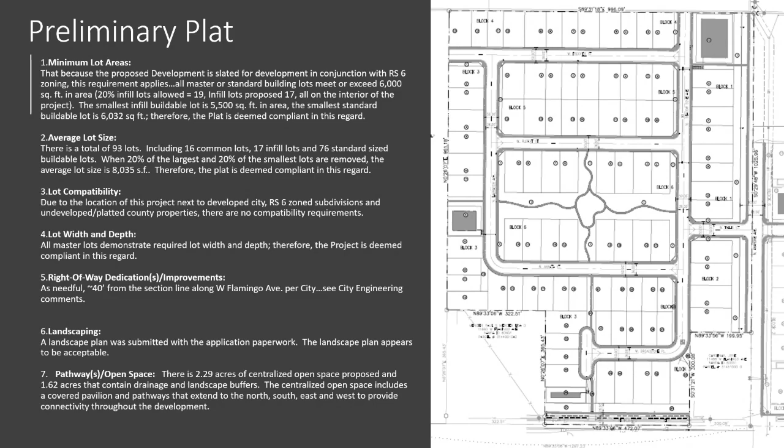So we did receive public input from the building department, from GIS for a couple of street names, and from engineering with their standard comments and conditions. The conditions of approval listed in your staff report reflect those comments.

This is your motion for recommendation to City Council for the annexation and zoning to RS6, and this is your motion for the action on the preliminary plat. I will stand for any questions.

Any questions for Kristi? Do we have sign-up sheets in the back for people that are here? Not for this one. Do we have anybody signed up on the spreadsheet? Nobody signed up for number 1 on the spreadsheet. Nope, that's it then.

Did you guys have any questions for the applicant? Then I would entertain a motion to close public hearing. Second. It's been moved and seconded to close public hearing. All those in favor? Any opposed? Okay, public hearing is closed.

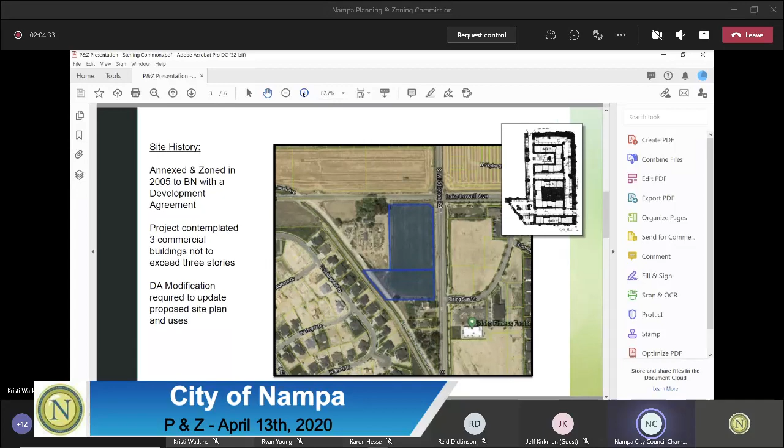So it was annexed and zoned in 2005 with a development agreement. At the time, the project had contemplated 3 commercial buildings not to exceed 3 stories. And what we're requesting tonight is a DA modification to modify those requirements as well as the site plan.

What I've provided on the screen for you this evening was the original site design for the project that contemplated an access off of Lake Lowell, as well as off of South Middleton Road, and I'll get into that a little bit later. It also showed large commercial buildings, 2 U-shaped buildings on the site, as well as one on the southern boundary that was a strip building. These buildings were not to exceed 3 stories or 30 feet. And in our southwest corner, there was a parking lot for those facilities.

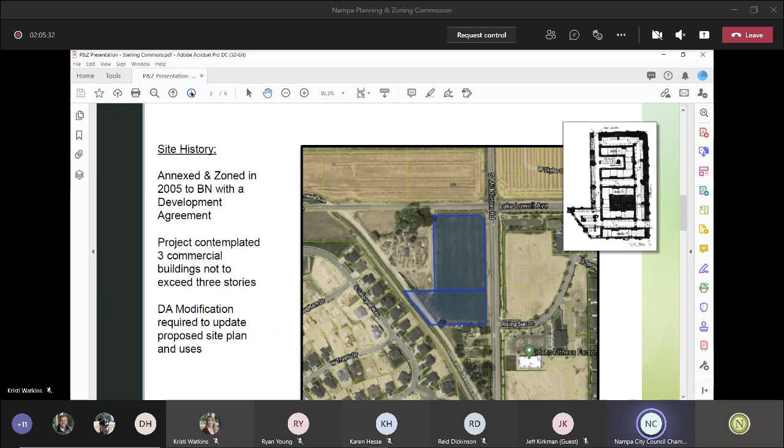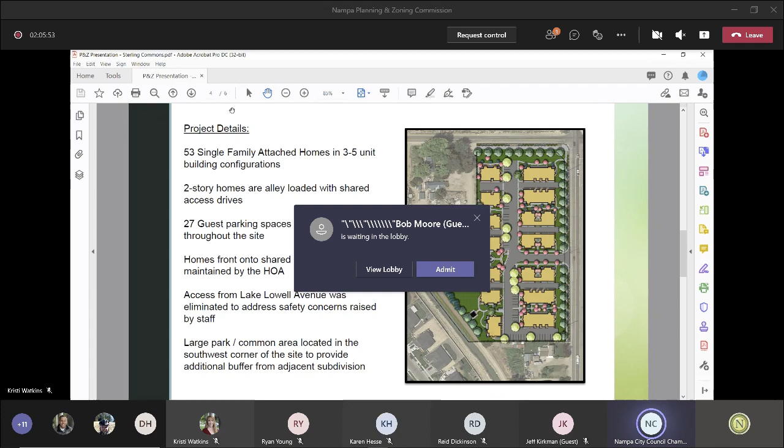Next slide please. So our project tonight that we're bringing before you is 53 single-family attached homes, townhomes, in 3 to 5 unit building configurations. These are 2-story homes that are alley-loaded with shared access drives. We have 27 guest parking spaces also dispersed throughout the site, in addition to the parking that's required for each unit.

We have a 25-foot landscape buffer along Lake Lowell Avenue, as well as along South Middleton Road. And these homes will front onto a landscape mews that is maintained by the HOA. So there will be a lot of common spaces throughout the project accessible to all of the residents, open, active, and passive green spaces for everyone to enjoy.

Can you go back for a second please? So in response, and we really appreciate working with staff on this, we made a last-minute change in response to comments that staff had made about concerns with the access onto Lake Lowell. As you saw in the previous application that's part of the current development agreement, there was an access point off of Lake Lowell. There was some concern that the traffic conflicts with the intersection, as well as the Whistle property, the undeveloped parcel to the west, could create issues in the future.

So we worked with staff to revise that plan, and what you see before you tonight is we eliminated the access off of Lake Lowell. This changed the configuration of our site plan, but we feel it's a better plan in terms of safety as our primary concern. So now we take primary access off of South Middleton, and we have a hammerhead turnaround at the north end of the site to meet fire turnaround standards. Engineering has reviewed it and they were okay with the plan. Actually, Caleb had suggested somewhat of this revision that we've fine-tuned.

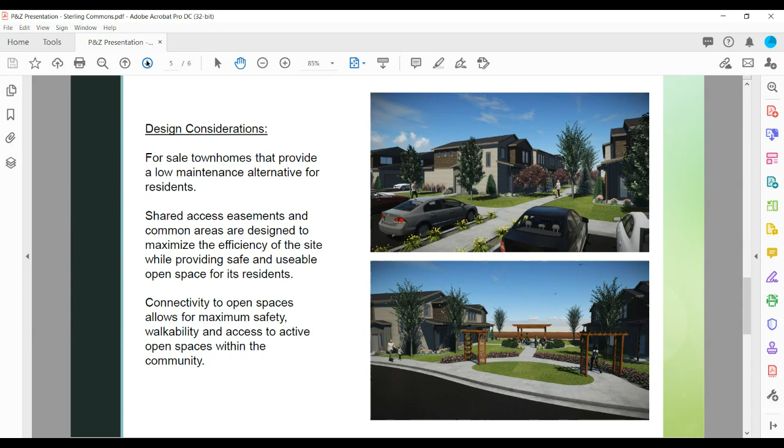So as you see on the slide at the top, that's a shot of what it would look like down the common mews, where folks would access their front doors and their patios would front onto that — some active and passive open space there. The image on the bottom is the view of the park as you drive into the site, looking forward as you head west, into that common open space usable for everyone, with benches and lawn areas for folks to use.

Additional considerations: we are aware that there was a project that came before that was denied, and the neighbors were very concerned about that. We held our neighborhood meeting, and they voiced their concerns about the potential impacts this project would have on their properties.

Our additional design considerations for this site layout really focused on a few things, including the surrounding conditions. This project sits actually 10 feet below the Carriage Hill subdivision to our southwest. That was the bulk of the comments we received, from those homeowners. We did have some folks say this is a great project and they're looking forward to it, but others had concerns.

To address that, not only do we have the canal as a buffer — an 80-foot easement — but we placed the park deliberately in that corner to provide some relief between the two densities. In addition, we oriented the buildings and placed the smaller three-unit buildings adjacent to that side, to help transition the density from the lower density out to our site. The site slopes from the southwest corner to the northeast, with 10 to 12 feet of fall through the site heading northeast, so we've tried to place the buildings to help minimize any perceived effects. The canal easement provides additional buffer, and we've tried to orient the buildings to work well within the site and within the context of the other homes.

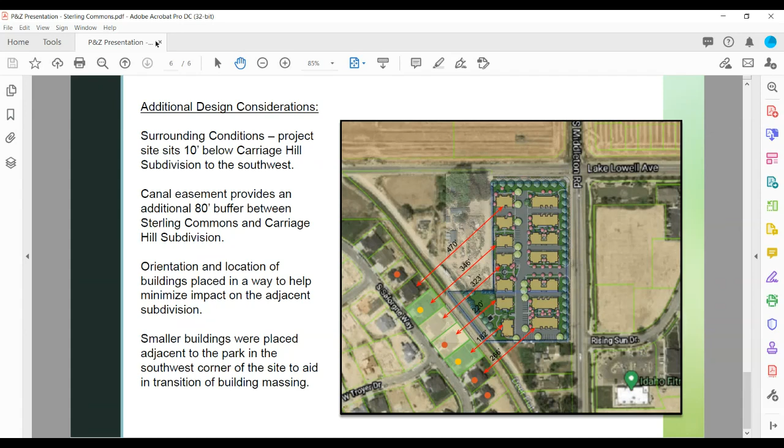So with this project, Kristi, maybe if you could change back to the site plan itself. There we go. So in making some of these changes to improve the safety, there were a couple of other advantages that happened.

We actually were able to increase the amount of usable open space for the development. We did actually increase a couple of lots as well. So we went from 50 to 53, but really trying to maximize the usability of the site, but then also making it a nice open space area.

For the residents. Also, when we made that change, we actually increased the number of parking units that we could get on site. So it seems a little counterintuitive, but the types of buildings, modifying from a 4-unit building to a 5-unit building, the dimensions were different. So we actually gained parking, we gained open space.

And we felt overall at the end of the day, it was increasing safety, number one, of course, but then also being able to increase the amount of open space for the residents. Our total common open space is now at 26.6%. In this zone, there is actually not a requirement for open space, but we feel that this is a good use of the land throughout the project.

And let's see. As I mentioned, the staff has been great to work with. We've really appreciated their feedback. We've reviewed the staff report. We're in agreement with their conditions of approval that they've recommended. And so, tonight we're here to request your approval. And with that, I will stand for any questions.

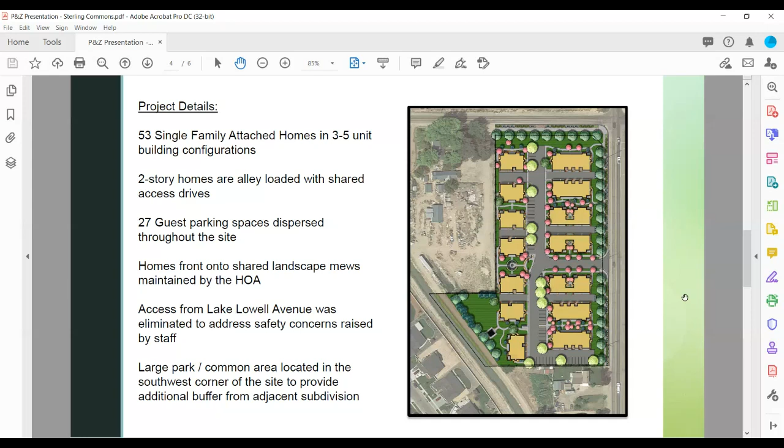Madam Chair, this is Commissioner Kirkman. I have a question. Go ahead. I didn't catch the applicant's name at the beginning, but we've had a few of these development agreement modifications come before us, and I'm sure that's not going to be the end of them.

But my question to you is the change in this particular development agreement that you're seeking, is it based on just economics and the change in the market and circumstances as far as housing, and was it just not viable for the commercial buildings? Yes, actually, we've looked at, this property has been annexed and zoned for a number of years and has sat vacant. I can only assume it was due to market conditions. Obviously, as we're all aware, housing affordability, availability and housing option type, throughout the valley, not only the city of Nampa, is very, very constrained right now.

Can I make a comment to Jeff, because I live right near that area, and maybe I know something he doesn't know. But right across the street from this is a very large vacant area that's got a gymnasium now and some other building going in, a dentist's office. And it's been that way for 12 years, vacant. So if there was any call for commercial buildings, they would have been put in there a long time ago. So they're probably making a very good decision, taking the commercial buildings out and putting in something that's more usable for the public.

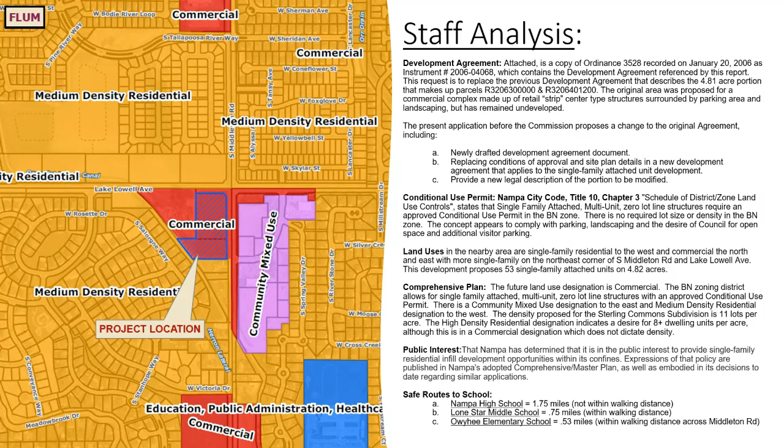The Safe Routes to School analysis states that Nampa High School is 1.7 miles away, which is not within walking distance. Lone Star Middle School is 0.75 miles away, which is within walking distance. Owyhee Elementary School is 0.53 miles away, which is within walking distance, but they would have to cross Middleton Road to do that.

The preliminary plat, based on the revised plat they are going to be submitting - not this layout, but the one she showed you, because I haven't received the preliminary plat from them yet - will provide for 53 buildable townhome lots and 10 common lots on 4.82 acres.

They shall not exceed 3 stories based on the BN zone, but I believe she has indicated that that would not be the case anyway. There are no requirements for a minimum lot size.

The landscape plan will need to be revised to provide better visibility at the intersection of Middleton and Lake Lowell and identify appropriate planting methods. A revised plan was submitted on April 7th that shows a 25-foot landscape buffer along Middleton and Lake Lowell, so that eliminates the request to City Council for the waiver.

The applicant has stated that pathways and sidewalks throughout the site offer safe connectivity and walkability for residents, while a continuous landscape palette provides an aesthetically pleasing and cohesive community. All common areas and open spaces will be maintained by the Sterling Commons Homeowners Association to preserve a unified appearance.

Nampa City Code 10-22 dictates the number of parking spaces required. Single-family and multifamily residential shall provide 2 parking spaces per dwelling unit. This project is required to provide 106. In addition, they've proposed 27 guest parking spaces.

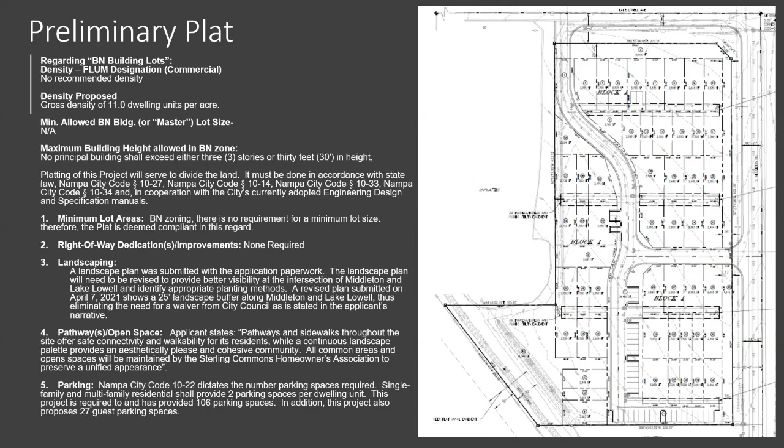Did we have anybody sign up here to speak? I have 2 people on the list here. Did we have sign-up sheets back there? If they came in and wanted to sign up, we signed them up on that spreadsheet. Oh, because I got this spreadsheet sent to me like 3:30 this afternoon. Just a link. I saved it to my iPad. We have 2 people signed up, Palmer and Swanson. So that's all we have, and Sharon Palmer are opposed.

Are they here to testify? And then Rob Swanson says he has concerns. Is Rob here? Okay, what about online? Not seeing those names online.

Is there anybody here that would like to testify on this matter? Come up and give your name and address for the record. Hello, I'm Cheryl Higley, and I'm at 12441 South Abbott Downing Way here in Nampa.

And I have concerns too. I live nearby, and I can't tell on the plans where the parking is, other than maybe the guest spots. I agree with the gentleman online - I think it'd be good to table it until you can see the final plat, or the preliminary plat. I've seen developments in Meridian where if the parking is supposed to be in their garage, I really can't tell from the design. I've seen where there's parking spilling out into the narrow driveways and so forth. And I'm new here, but I have a concern that in the commercial, the BN zone...

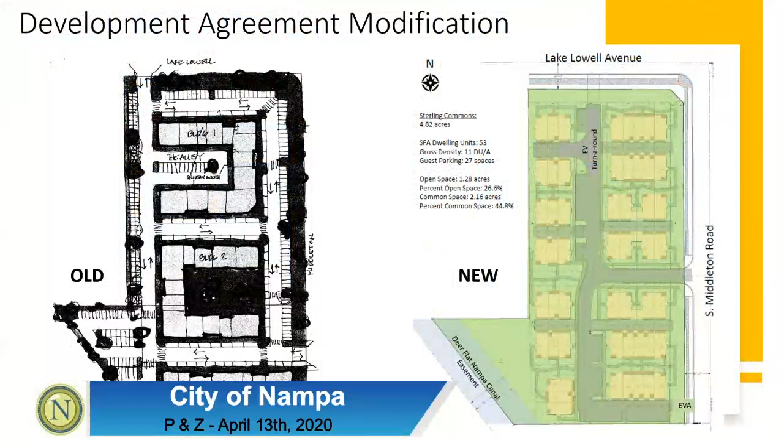First, I'll follow up with the question. In the staff report, and part of the conditions of approval, it was a comment that Caleb had made from engineering, and in our effort to address that access issue and illustrate that, that was one of the conditions of approval - that before we go to City Council, we submit the revised plat that matches this concept. We just hadn't had a chance, but we were trying to be on top of things and address those concerns and really demonstrate that we're taking staff's concerns and the neighbors' concerns seriously and get those issues resolved.

In the plan you see on the screen on the right-hand side, we've got a common service drive. It'll be a private drive. In Caleb's comments regarding our plat, he identifies that for certain dimensions there will either be striped no parking on one side or both sides, depending on the width. So we'll comply with what engineering requires out of that. I believe we have enough room.

We don't even really need to park on either side because, as you can see, those are all parking spaces there - perpendicular spaces. Each unit - some of the townhome units have a single car garage and some have a 2-car garage. So if you have a single car garage, you'll have one dedicated space out in the parking stalls that Christy's indicating where those locations are. We've got some along the southern border, some through there, and then some as you go up through there as well. So some will be dedicated for each unit if they only have a single car garage, and the others will be dedicated as guest parking spaces and identified that way.

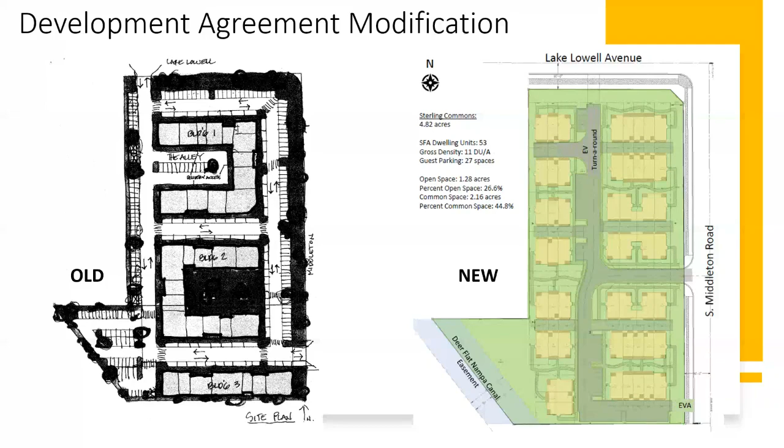I would entertain a motion to close public hearing. Second. Who made the motion, Brett? Brett made the motion, Ron seconded, to close public hearing. All those in favor? Aye. Any opposed? Okay, public hearing is closed.

You guys got 3 things.

Madam Chair, this is Jeff. Yes, sir. I don't hear anyone else talking, so I'm gonna jump in here. I think you had those questions before. It sounded like you were ready to go.

So I think this is a great project, and I appreciate the developer's concern for mitigating some of those issues with the proximity to the neighbors and putting those smaller buildings closer to the homes there. I think this is going to fit well in this location. So if there's no further questions or comments, I'm going to make a motion that we recommend approval to City Council.

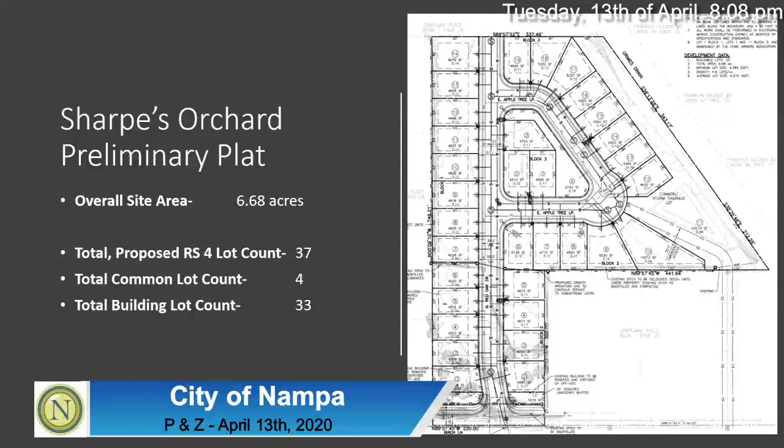I've asked Parker to put the site plan up. This is an infill project off of Birch Lane. We're proposing 33 residential units on just shy of 7 acres. The property to be annexed is located in the medium density residential comprehensive plan designation, which calls for a gross density between 2.51 and 8 dwelling units per acre, and this is smack dab in the middle at 4.9.

The zoning proposed uses the city's RS4 zoning designation. Surrounding zoning is all residential already, and there are no waivers of standards or variances being proposed with the application. It is a true infill site. The property is very easily served by the city, the city's sewer, water, and pressurized irrigation systems are already at the property and all have capacity.

I'd also point out that the property is located near employment centers, so it's in a good location. About 19% of the project is in open space, and we've proposed an internal community playground with a picnic shelter. Let me see if I can point to that. If you look at the internal island, the park area is on the east side there.

With regard to the staff report, and you'll hear from Parker in just a moment, we are in agreement with the terms and conditions that have been proposed. There's two items that I would note.

One is that the engineering department, Caleb, mentioned a suggestion that traffic calming measures may be warranted on Red Oak, the north-south street. So one thing we would like to look at with the engineering department is potentially a raised pedestrian crossing at the island that would allow folks to get from the west side to the east, and it would also serve to add some traffic calming through there.

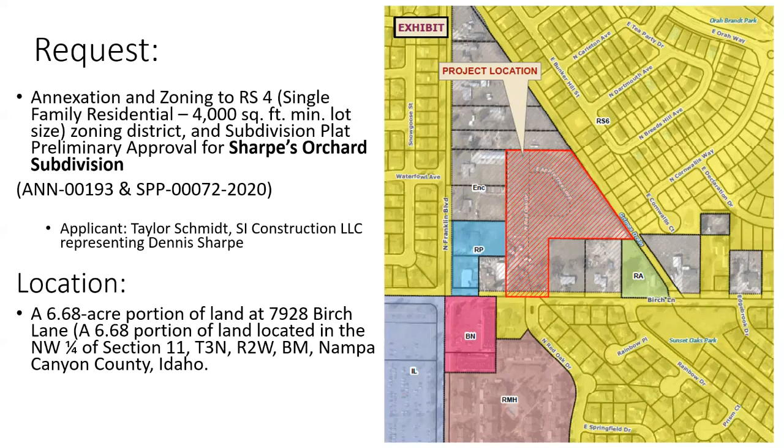The property is currently outside of the city limits, but is contiguous on multiple sides. It is bordered on the north by Canyon County residential properties, RS6 and BN to the south, RS6 to the east, and RP and Canyon County residential to the west.

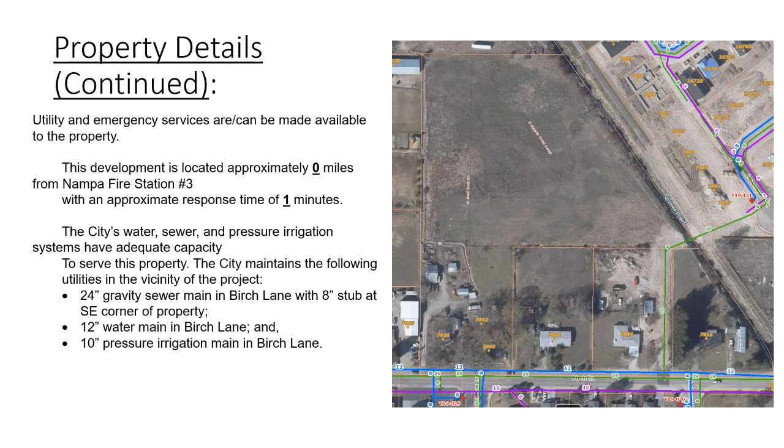The applicant's purpose is to zone the property RS4 to allow 33 buildable lots and 4 common lots. All utilities and emergency services are available. Nampa Fire Station number 3 is across the street to the south, with a response time of 1 minute. There is adequate utility capacity to serve the property.

The property is eligible for annexation since it is adjacent to Nampa city limits. The proposed zoning and development plan conforms to the guidelines set forth in the comprehensive plan. These are the conclusions of law required for annexation: that it be contiguous, that it be reasonably soon to be available for orderly development, and that it be consistent with the comp plan.

Single-family residential land uses surround or lie near the property, with some commercial uses nearby. The proposed RS district is intended for medium-density urban single-family residential and compatible uses.

A stable and healthy environment, together with the full range of urban services, makes this an important land use district within the community. It is in the public interest to provide varying residential housing opportunities for citizens, and the current real estate market has a pressing need for additional housing inventory. One of the major purposes of zoning is to promote orderly development, which preserves public health and safety. Site development will be regulated by the building permit review process in accordance with the RS zone regulations.

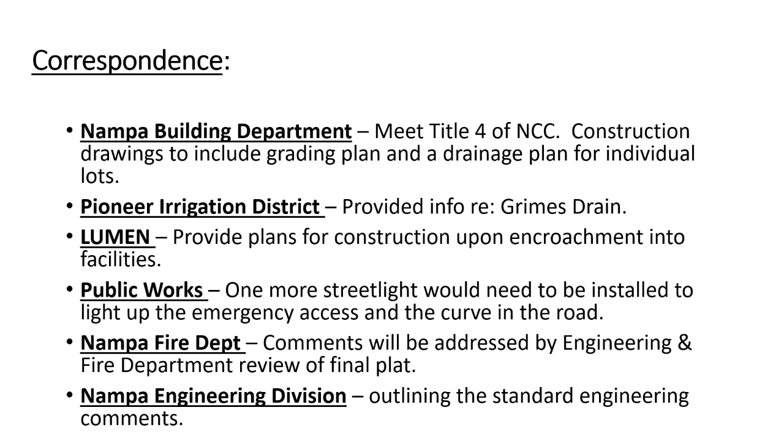We received information from the police department regarding the development, stating it would increase personnel by 0.15 officers and 0.05 support staff. The closest police station is 3.4 miles away. The reporting district receives 307 calls annually, and the top call type for the area is traffic stops.

Regarding the plat, the preliminary plat proposes 33 buildable lots and 4 common lots on 6.68 acres. The property will take access from Birch Lane with an emergency access to the southeast.

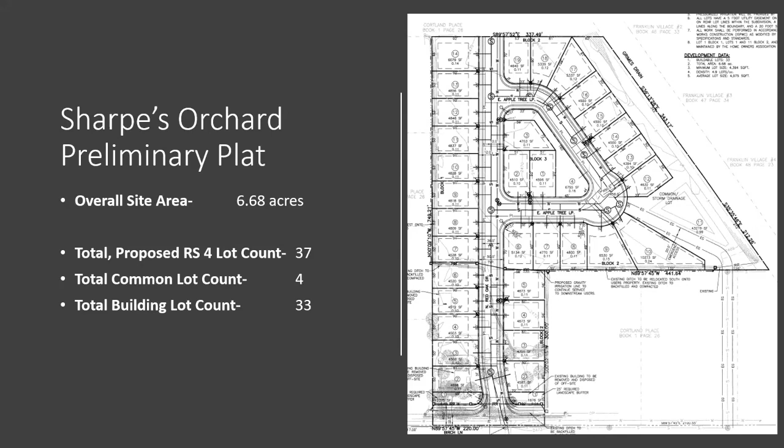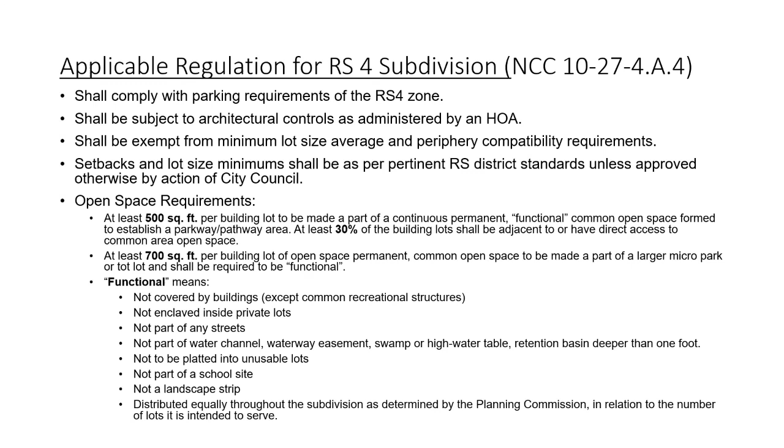RS4 subdivisions have additional requirements in regard to open space while being exempt from others. There's no lot averaging or lot compatibility requirements for RS4 subdivisions. Open space is required at the rate of 500 square feet per lot for pathways and 700 square feet per lot in functional open space. The term functional means essentially not being used for any other purpose, such as landscaping or streets, and it needs to be distributed equally throughout the subdivision as determined by the Planning Commission.

So all of the lots exceed 4,000 square feet, with the smallest being 4,394. Lot averaging doesn't apply, as I said before, and lot compatibility also does not apply. All the lots meet the required width and depth. Right-of-way dedication will be 40 feet from the center line of Birch.

The landscape plan was submitted and approved by the city forester. The open space overall equals 1.27 acres, which is 19%. The requirement for functional open space in RS4 is 700 square feet per building lot, which equals 0.53 acres for this subdivision. So if you exclude the landscape buffer, emergency access, the ditch, and drainage pond, the subdivision proposes 0.51 acres of functional open space.

But if the drainage lot is able to be used as functional open space, which engineering has stated would be possible depending on the materials they used, the total space would be calculated at 0.71 acres. The only proposed pathway is the emergency access in the southeast corner of the subdivision, and here's a calculation of that.

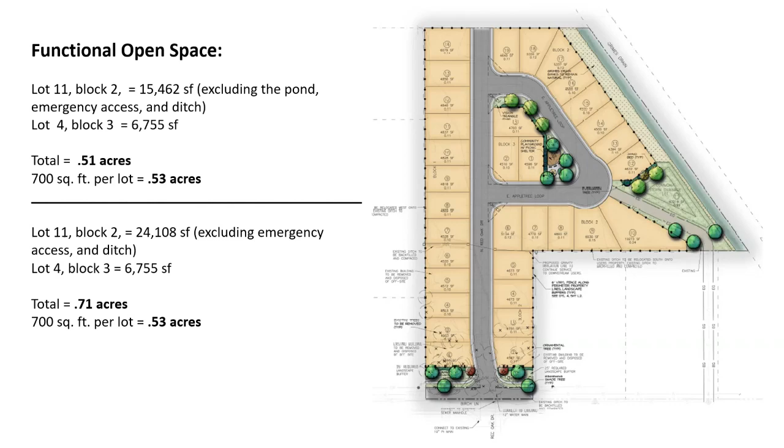The conditions of approval are listed in the staff report, which we can go over if requested. It's standard conditions requested by various departments. And these are the potential motions for annexation and zoning, as well as the preliminary plat. I will stand for any questions.

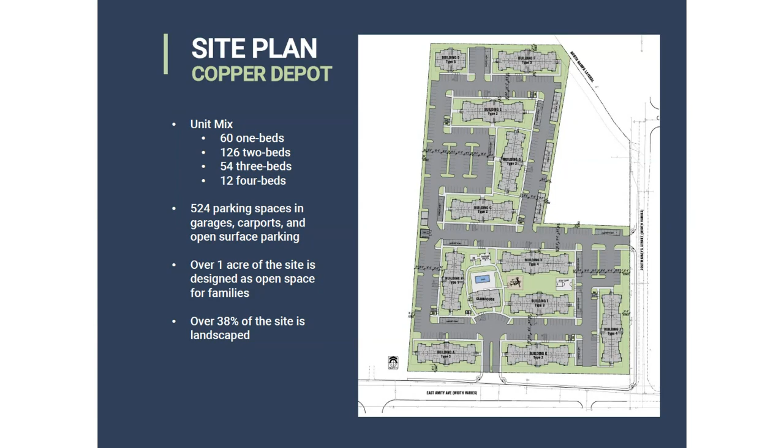I think the main thing I want to hit on here is what we're proposing. I've read the staff report, met with one primary neighbor, and I know we're going to have opposition, and I understand that—I don't take it lightly, and I don't dismiss it, but what I really try to do is mitigate to the best of our ability. I think it comes down eventually to whether it's this body or council deciding if the greater good of the community is worth it, and if we've done all we can reasonably to mitigate. In this case specifically, there's a development agreement in place that allows commercial development, and that commercial development could be substantially more impactful than multifamily development. So it's hard for me to tell neighbors with a straight face what I'm doing could be worse, but the reality is, without a CUP approval, it could be worse.

I want to, Christy, if you can go to the next slide, please—just talk through our site plan a little bit more, and talk about some of what we've tried to do to not adversely affect the neighbors.

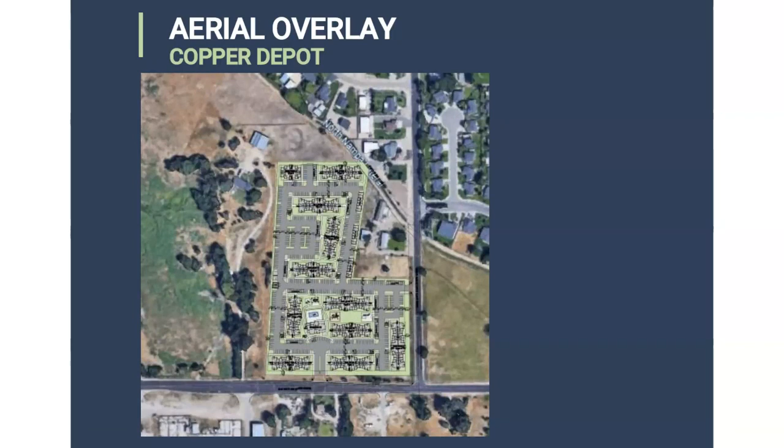I would otherwise mention, in terms of appropriate development and not adversely impacting neighbors, that a condition of approval will be following any traffic mitigation measures as detailed in the traffic impact study, and we're of course willing to follow those.

Maybe we could go ahead a couple of additional slides. I don't want to spend too much more of your time other than to really just hit on: we take a great deal of pride in making sure we deliver a product that's indistinguishable. It's affordable, which means there are rent requirements and income requirements, but we want that to be indistinguishable from market rate apartments. So we build a product that we feel you would never know the difference.

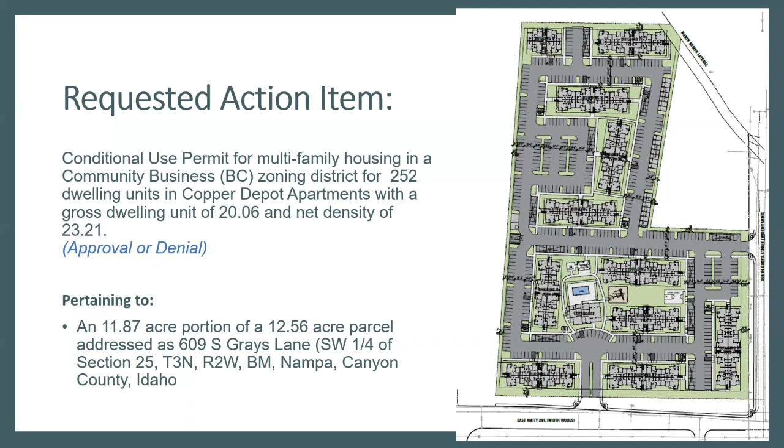So some history on this property. In November of 2008, this property was annexed and zoned to BC with Ordinance 3913. And I do have a typo, I believe, in my staff report. The development agreement does not provide a list of uses that were permitted or not permitted for this commercial zone. The property is currently within the city limits and is zoned BC.

It has Canyon County residential and RS18 to the north. Canyon County property to the south, which was the old meat processing plant. Canyon County to the east, which is a residential property. And Canyon County to the west, which is also a residential property.

So services, utility and emergency services can be made available to the property. The fire department has noted that it is approximately 3.1 miles from Nampa Fire Station number 1, with a response time of 8 minutes. Sewer and water have adequate capacity here. There is sewer and PI. They're not readily available, and they will require some easements through other properties to the east and west, or there is a significant stretch in Amity to accommodate the connection to this service. There's a 12-inch water main in Amity Avenue and a 10-inch water main in Grays Lane.

So if you choose to approve, you are required to find in accordance with these criteria in Chapter 25. So the applicant's request for the conditional use permit for multifamily in a BC zone is required by code in Chapter 3. The proposed multifamily dwelling development, location, size, and design should not adversely affect the livability or appropriate development of the abutting properties and surrounding neighborhood. That the location, design, and site planning of the proposed multifamily apartments will provide a convenient and functional living, working, shopping, or civic environment, and will be as attractive as the nature of the use and its location and setting warrants. And that the development is consistent with the appearance of the area and enhances the area in its basic community function.

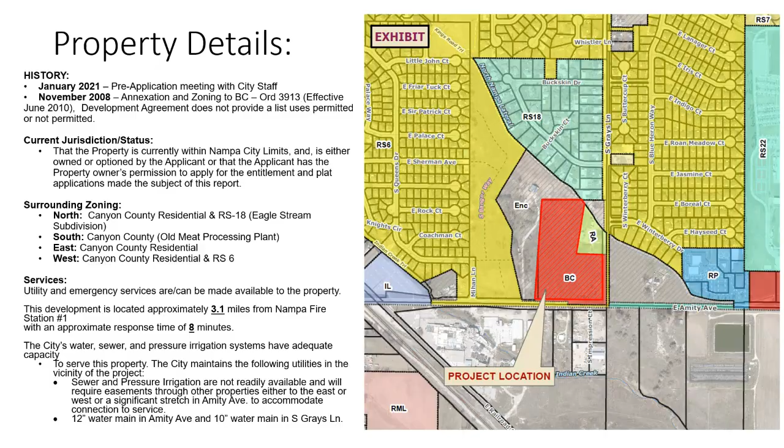It's a tricky one. Here, I've got a few comments I'd like to make. This was annexed in 2010, is that right? So the Buckskin or Buckhorn subdivision, the Meadows were both in long before that. So the public at that time was evidently okay with it being that.

We now have another subdivision just to the west, about 70 homes. Buckskin is all half acre, bigger lots. The Meadows is all RS6, decent sized lots, and the new one going in is decent size. It just, to me, is not compatible with everything that's going to be on three sides of it. It doesn't fit in the neighborhood. I have a hard time giving it a conditional use permit to change it from what the neighborhood agreed to

back 11 years ago, to allowing this to go in. You look at it from an aerial view and you've got nothing but single family homes, single and two-story homes, and that's basically going to be on three sides of it other than the wedding venue. It just does not fit in the surrounding area. It just is not compatible. I just don't see it fitting at all in there, whether it be two-story, three-story, or what. Multifamily just does not fit in that neighborhood to me.

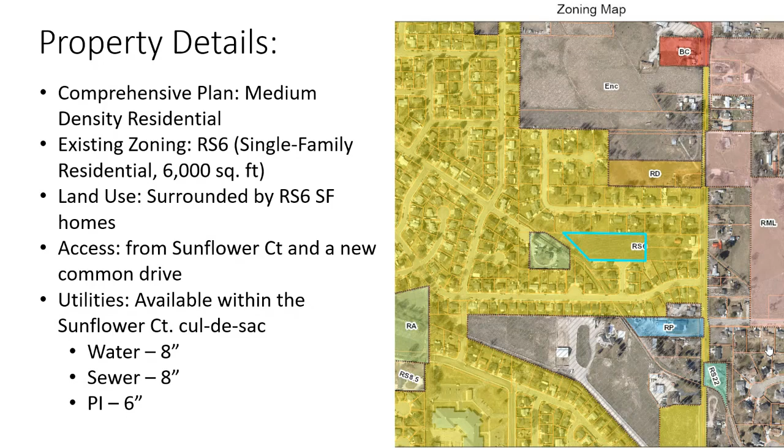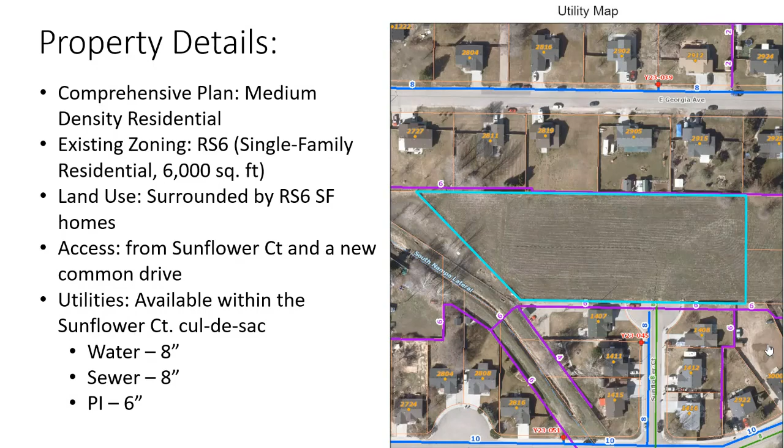It's accessed from Sunflower Court. I'm sorry, I didn't progress through the zoning, there's the zoning there. It is accessed from Sunflower Court, so you can see that unfinished cul-de-sac. They'll basically finish out that cul-de-sac and then have a private drive to access the other 4 lots. Utilities are available to the property.

Lot 6, 7, and lot 1 are all accessed off of the cul-de-sac here. There's more than 22 feet here accessing the cul-de-sac, and then the private lane for these other 4 properties.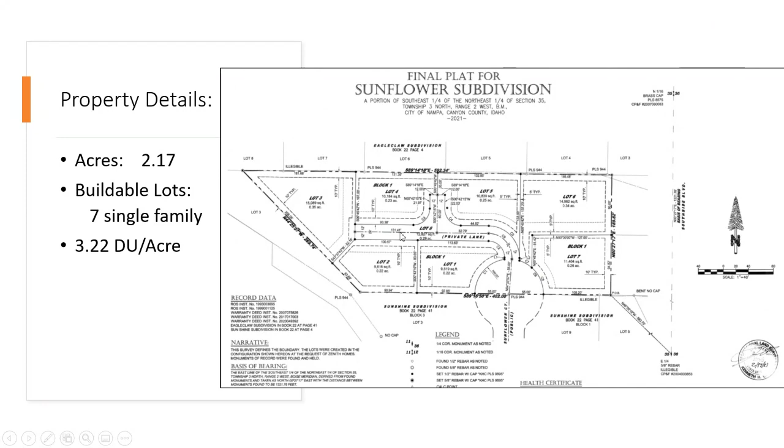So applicable regulations 1027-4F outlines the conditions of how you would look at this for approval. I've highlighted those. You need to evaluate a proposed plat's design based on city codes and the standards identified in the approved subdivision process and policy manual and the standard construction specification manual.

1081 notifies us that single-family residential, our single-family residential district, is intended for low-density urban single-family residential and compatible uses. So this fits into the RS zone because it's single-family homes. There is a limit, though, that I wanted to point out here: building height regulations of 2.5 stories or 30 feet in height. There was a question about the 22 feet that I pointed out before accessing the cul-de-sac,

but that was simply because the scale on the preliminary plat was incorrect. It should have been a 1:30 instead of a 1:20. So when I measured it out, it just didn't come out to 22 feet, but when we got the correct scale, it was correct. 1086C, minimum property structure and parking front yard setback is 20 feet, and that complies. The side yard setback is 5 feet.

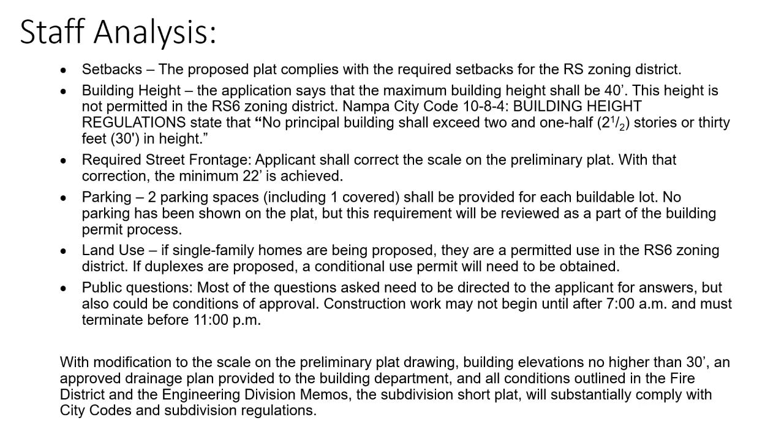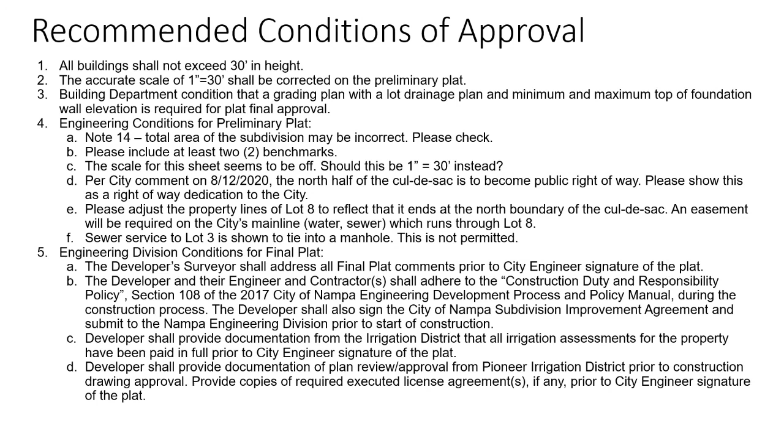As I mentioned, there were public questions that I would suggest you ask the applicant to respond to. So with the modifications to the scale on the preliminary plat, the building elevation no higher than 2.5 stories or 30 feet, the approved drainage plan provided to the building department, and all conditions outlined in the fire district and engineering division memos, the subdivision short plat will substantially comply with city codes and subdivision regulations. These are the recommended conditions pulled from those comments or correspondence we received from agency partners.

And here's the rest of those, there's quite a few. Placed on the screen, I've given you the potential motions for approval or denial of the project. Now I will stand for questions. Any questions for Rodney?

Okay, let's go to public hearing. I have 2 people. Brandy was one of the people whose concerns you just read, so we have her listed. And then I have a Randall Moe who wanted to speak.

Not here. Is Randall online? Rodney, I can't see you, so I don't know what you're doing over there. Sorry, I'm looking. Is he taking a nap? I did see it, I don't see his name listed. Okay, he stopped by the office? Okay, well, he was opposed, that's what it says, so okay.

Is there anybody here who wants to testify on this? Okay, I would entertain a motion to close the public hearing. Second. Moved by Steve, second by Adam, to close public hearing. All those in favor? Aye. Any opposed? I'll just mention this so it's on the record that Tom has recused himself, so he's not voting.

Madam Chair and Commissioners, Doug Critchfield. This property is located — can we bring up the screen? There we go, thank you. This property is located in a low-density residential area, it's in the comprehensive plan. It's a quarter-acre lot with RS6 zoning, and it's surrounded by RS6 properties.

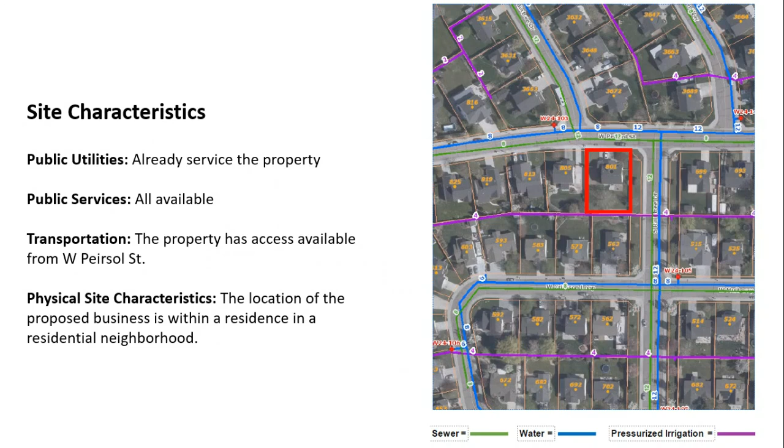No employees are allowed to work on the premises, so therefore no parking is required on the property.

The 12 to 15 people at the residence mentioned by the applicant would include delivery drivers for UPS or FedEx for product pickup.

There are regulations about home occupations that have come before the commission before. Just as a reminder, these are in Chapter 1 of Title 10, and they have to do with the fact that this should be an inside-the-home type of business. The concerns you're weighing tonight are the incompatibility or compatibility with residential living in this area. There are several conditions listed in your staff report, also found in Chapter 1, regarding home occupations that would apply to this application.

In terms of conditional use permits, the commission needs to be concerned about the size of the proposal in terms of its impacts to the neighborhood, and the operations and effects those would have on adjoining land uses or growth and development of the community as a whole.

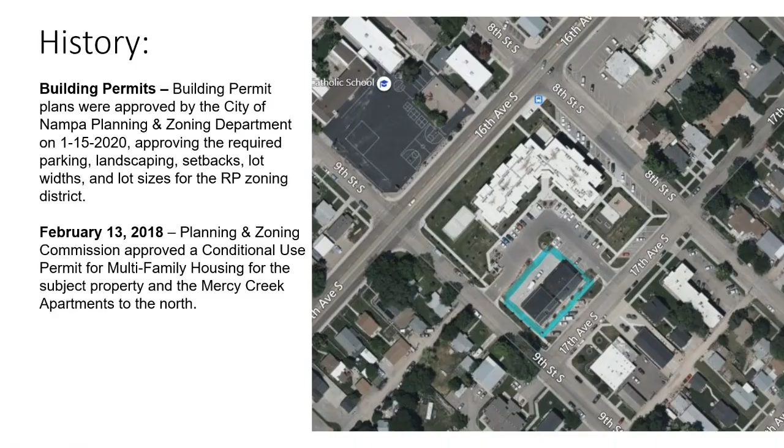Yeah, I'm going to have to learn that. Okay, so highlighted in blue you can see the proposal boundaries here. This is the Mercy Creek apartments. As part of those apartments, these came in as 2 duplexes on a single lot, and all they're proposing to do is divide that into 2 separate lots so each duplex is on its own lot to be sold separately. The rezone has to happen because the setback on the sides in the RP zone is 8 feet from the property line, and they only have 10 feet between them, so the rezone is necessary.

So it's pretty simple, it fits the comp plan. I think it kind of makes sense in a lot of ways. There's the outline. So, okay, I'm going to jump to the potential motion.

So Rodney, yeah, this has nothing to do with Mercy Creek Apartments? So it's not part of that, of the Mercy Creek or any of that—these are complete separate lots? Madam Chair and Commissioner Kirkman, what's happened here is that it was part of the original Mercy Creek subdivision, right, and then you've got this separate parcel all by itself. If you split it again, you have to do a subdivision, so it becomes its own subdivision, but it was originally part of the Mercy Creek development. Okay.

So we'll open public hearing. Daniel, do you want to testify on this? Motion to close public hearing. Second. Okay, motion by Ron, second by Adam to close public hearing. All those in favor? Aye. Any opposed? Okay, public hearing is closed. Somebody read quick.

Madam Chair, I'll make a motion to approve the zoning map amendment—sorry, not the short plat, the zoning map amendment—from RP to RML at 821, 823, 827, and 829 17th Avenue South for Joshua Morrison, with all conditions of approval and conclusions of law. Second. Okay, motion by Ron, seconded by Brett. All those in favor? Aye. Any opposed? Okay.